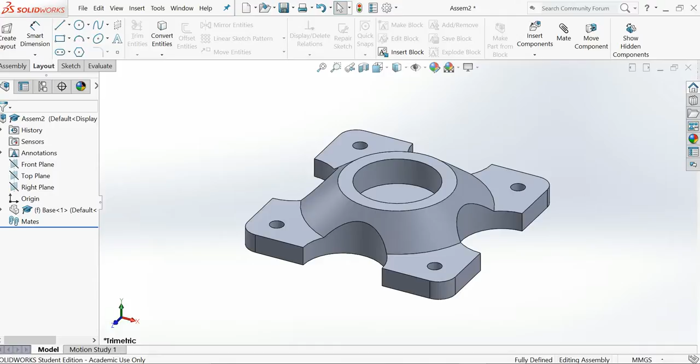Okay, first you have to bring the base. Click on OK to fix this base on the origin. It means that the origin of the base and the origin of the assembly are fit together. Okay, very nice. The next part is the lower mast.

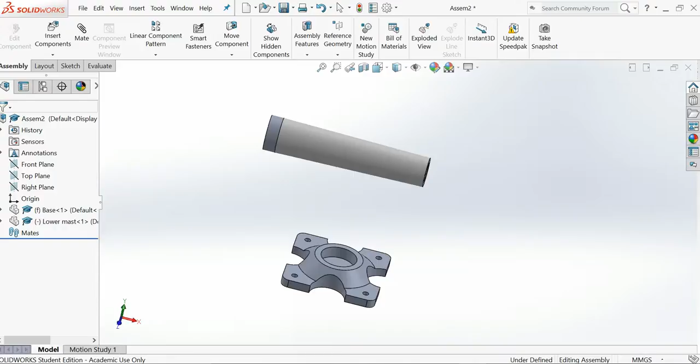You have to come here, assembly, insert the components, browse, lower mast. Okay, this is lower. Click the lower mast here. Click on this plane and this plane. You have to push the control button. Okay, and click on mate and click. Okay, after that you have to click on this and this

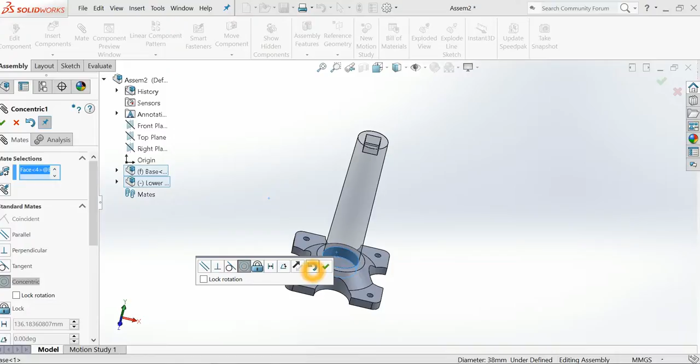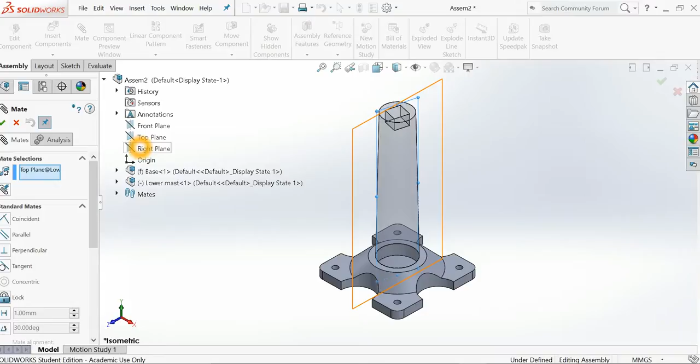again. Okay, but as you see, this is rotating. You have to fix this also. What we have to do is come here, the lower mast, select the top plane, mate with the top, okay, or right plane. Okay, perfect. And now it's not rotating because it's fixed now. Okay, perfect.

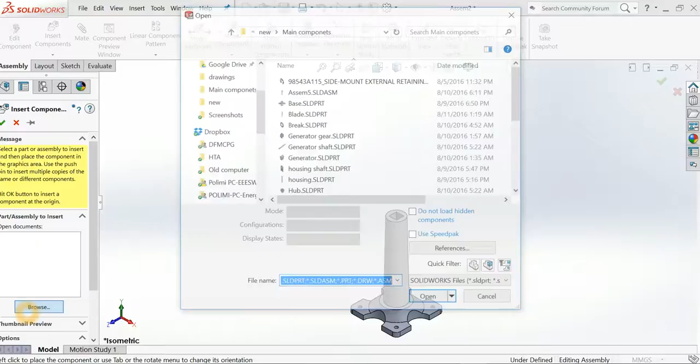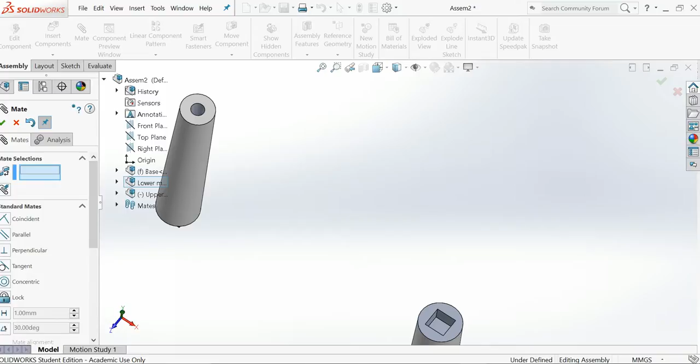For the next part, we have to insert the upper mast. Okay, again, browse, upper mast here. Perfect. Click it on the surface. Okay, now for this you have to click on this one, mate with this line. Okay, click on that way, and then return back. This line must be fit on that one.

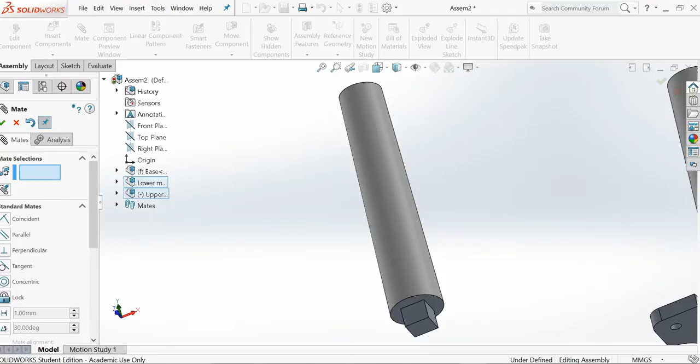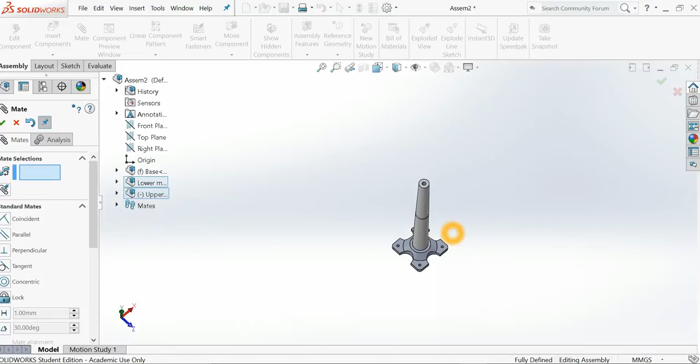Okay, now I guess it's not fitted yet. Okay, select this line, this part, or this plane with this plane. Okay, now what do we have to do? This one to this one. Okay, it's fixed now. It's not rotating also. Control 7 for isometric. Very nice. As you see, there is no rotation. Perfect.

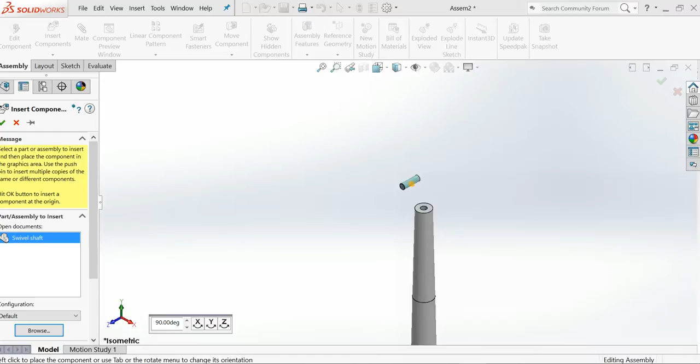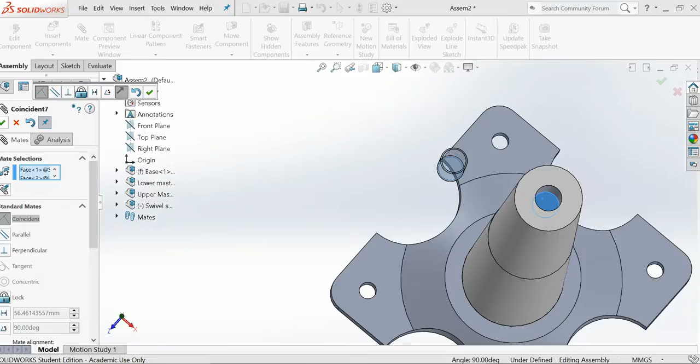The next component is the swivel shaft. Okay. It is something like this. You have to mate this one with this one. Okay. Okay, mate. Perfect. And this one must go inside this one.

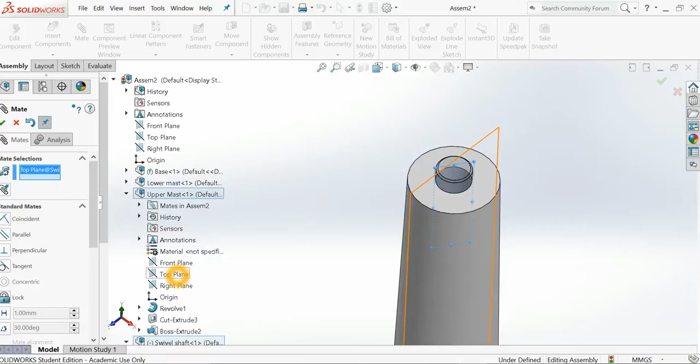But as you see, this is rotating. Okay, to stop the rotations, you have to come here, this top plane and upper mast top plane are fit together. It's not rotating anymore. Very good. Also, it's not coming up.

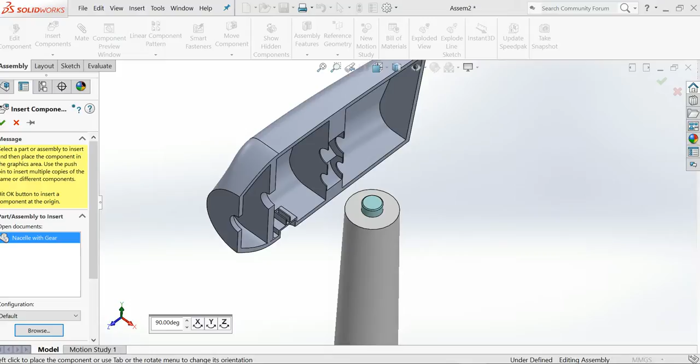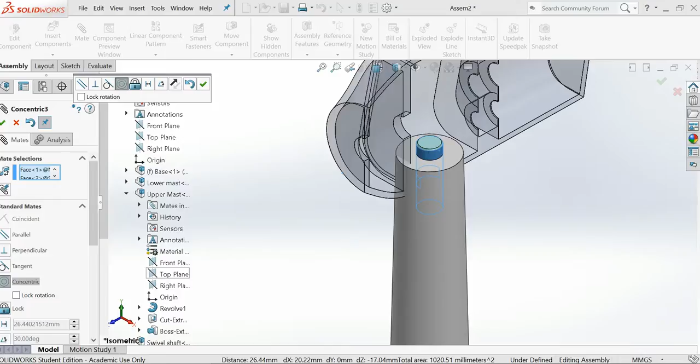And insert the next component. It must be the nacelle. Okay, click the nacelle here. Okay. For the nacelle, this part must be fitted in this part, mate. Very nice. But the problem is the moving of this, you have to push this one, fit it on that. Okay, perfect. But the problem is that this is rotating, so we have to stop this rotation.

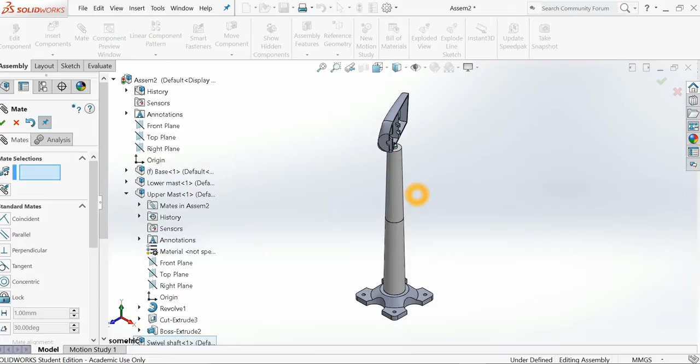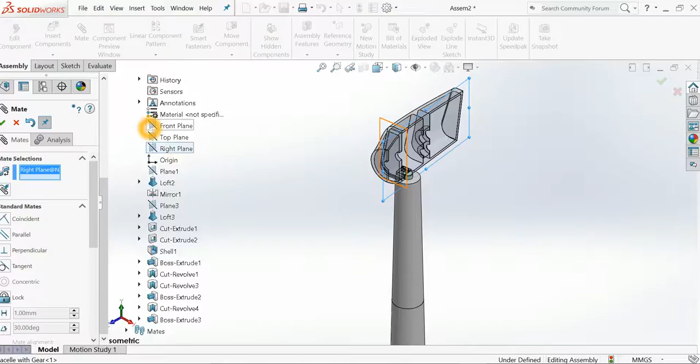Controls. Okay, very nice. To do that, upper mast and nacelle with gear. Okay, to do that, I have to come here. The top plane, front plane. Okay, right plane. Mate it with the top plane, right plane. Very nice. And this is also fitted. Okay, very nice.

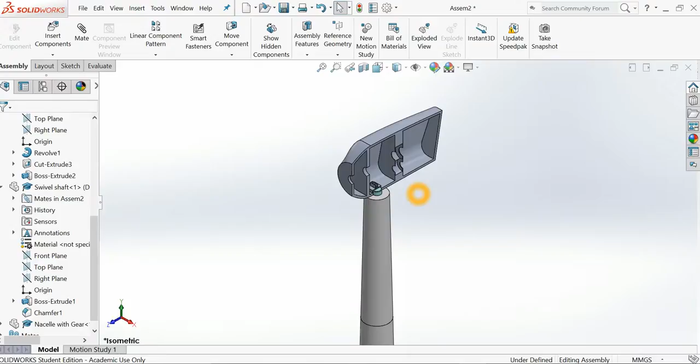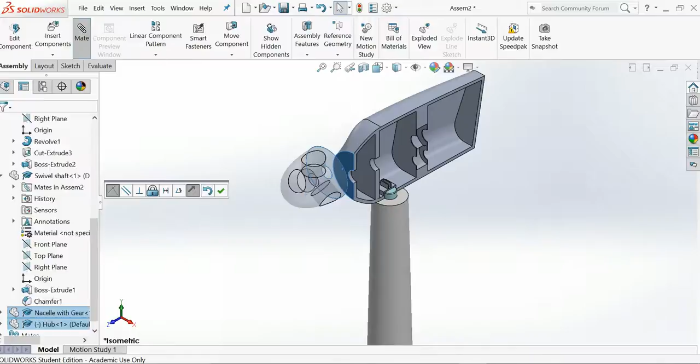Now, I have to bring the hub. Where is the hub? Okay, click on the hub. Hub, here is that hub. Okay, the hub and this mate, but not fit together. We need a distance of 1 or 2 millimeters. 1 millimeter is enough. Okay.

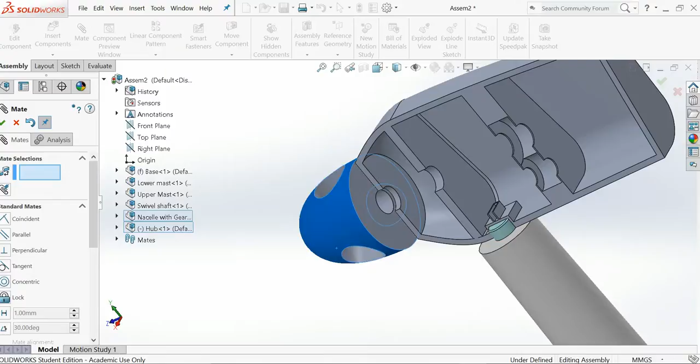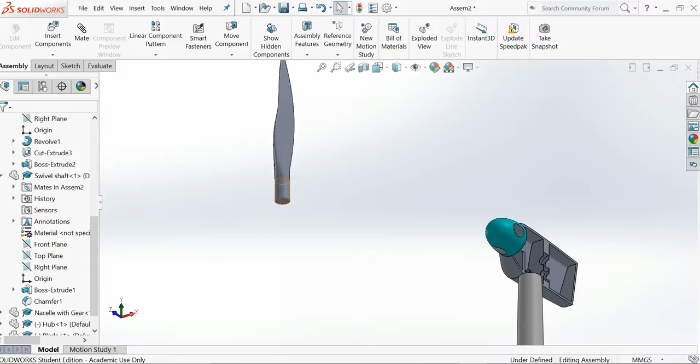Now, this and this must be axisymmetric, like that. But I don't want to keep this rotation fixed because the blade must rotate. Okay, so skip like that. Okay, insert another component. Now the blade is coming. Okay, blade is coming. This is the bottom surface of the blade, and this is like that. This is mate.

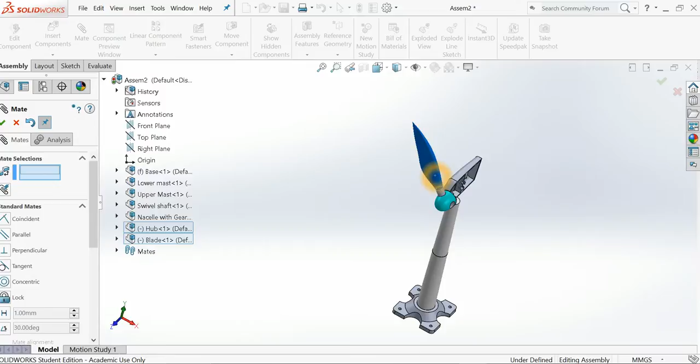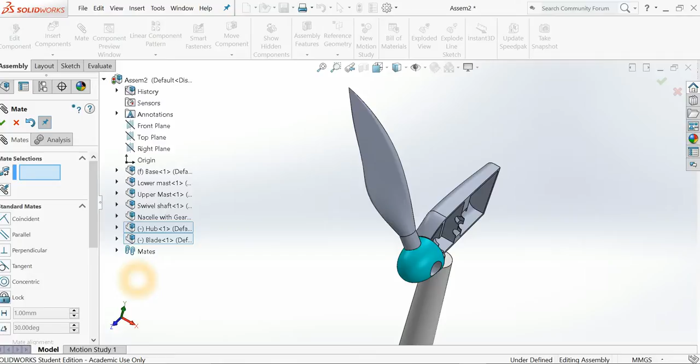Okay, now this part must be fitted on this part, and we have a rotation like that. Okay, but this rotation, based on aerodynamic lectures, is different, but for this lecture I would choose something like this. The blade on the right plane.

Okay, let's see the right plane, and on the plane of the hub. Okay, I would choose an angle of, for example, 20. Okay, of 20, and it's coming here, and it's not just rotating like this. Okay.

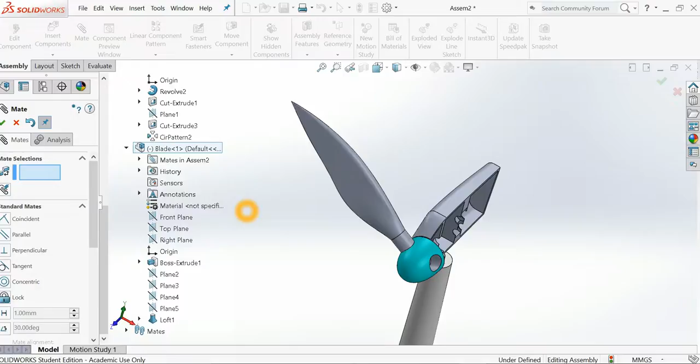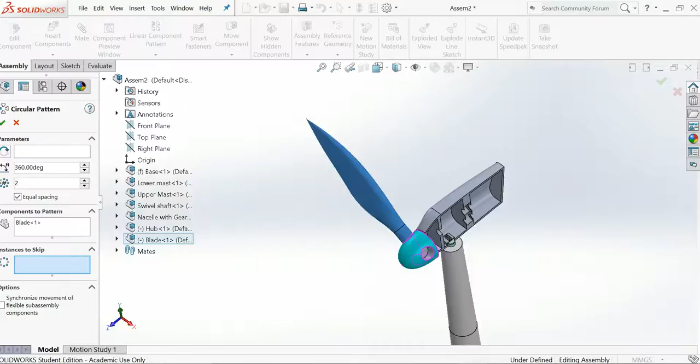Now, okay, linear pattern, circular pattern. This is the component of the pattern, like that. Skip it. This is the instance to skip. Okay, this one must be this one, and 3 equal spacing are fitted all together, and you can see that it's rotating. Perfect. Control 7. Okay.